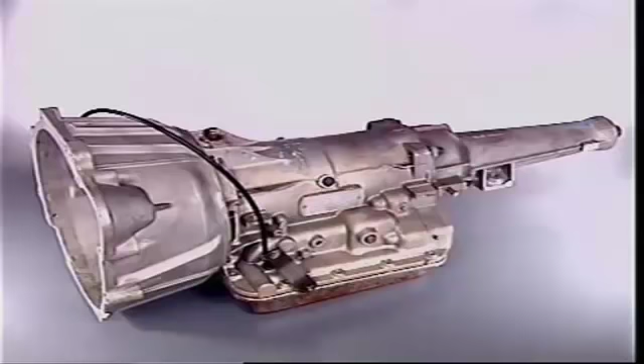A Borg-Warner 35 transmission has 3 forward gear ratios and reverse. The selector lever works in a quadrant with 6 stations: park, reverse, neutral, drive, second, first.

With D selected, the vehicle will move off in first gear, will change to second and then to third, in accordance with road speed and engine load.

Downshifts from third to second or second to first are also fully automatic, unless the driver resorts to kickdown. Kickdown changes are useful when short bursts of acceleration are required and occur at higher speeds than automatic changes. Automatic upshifts occur immediately accelerator pressure eases, following a kickdown.

Automatic gear changes may be overridden by use of the 2 and 1 selector positions. If 1 is selected from rest, first gear will be held until the selector is moved to 2, when second gear will engage. Moving to D will then give third gear, provided that road speed and throttle opening are suitable.

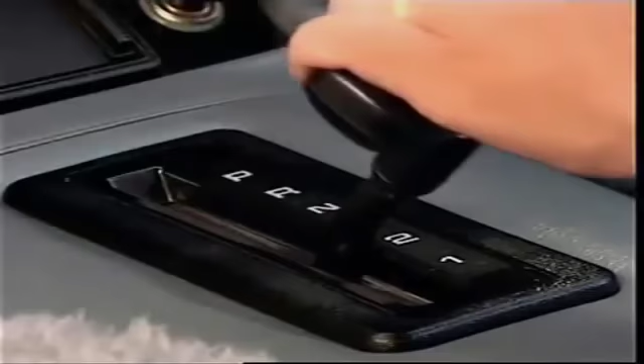Selector position 2 also permits automatic changes, but from first to second and from second to first only, depending on road speed and throttle opening. Third gear will not engage in this position.

With the vehicle cruising in third, selecting 2 will cause an immediate downshift to second. Selecting 1 in similar conditions causes an immediate downshift to second, and then, when road speed drops sufficiently, to first. Full engine braking is available in both second and first gears.

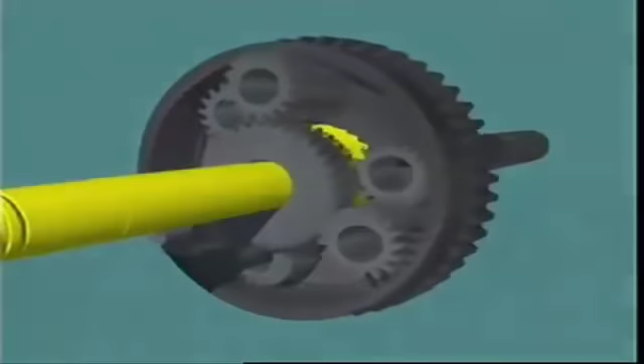The planetary gear set is a Ravigneaux type with primary and secondary sun gears, primary and secondary planet pinions, and 1 ring gear.

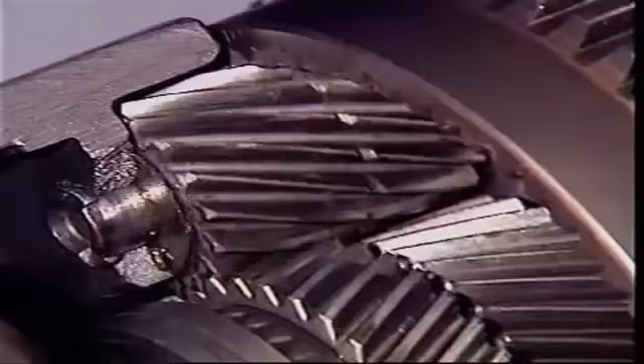The ring gear is attached to the output shaft. The planet carrier is mounted in the transmission case on a 1-way clutch. Both sets of pinions are in the planet carrier. They mesh in pairs. The longer outer secondary pinions mesh with the ring gear at their outer edge.

At their inner edge, they mesh with the secondary sun gear. The smaller primary pinions mesh with the smaller primary sun gear. The planet pinions transmit the drive from the sun gears to the ring gear.

In all forward ratios, drive is transmitted through the primary sun gear. In reverse, it is transmitted through the secondary sun gear.

Control of the planetary gear set comes from the operation of 2 multi-plate clutches, the 1-way clutch and 2 brake bands. The outer plates of the front clutch are splined to the input shaft from the converter turbine. The inner plates are splined to the primary sun gear shaft.

The inner plates of the rear clutch are splined to the front clutch drum. The outer plates connect to the secondary sun gear.

The front band wraps around the outside of the rear clutch drum. The rear band is on the outside of the planet carrier to hold the planet carrier stationary when it is applied.

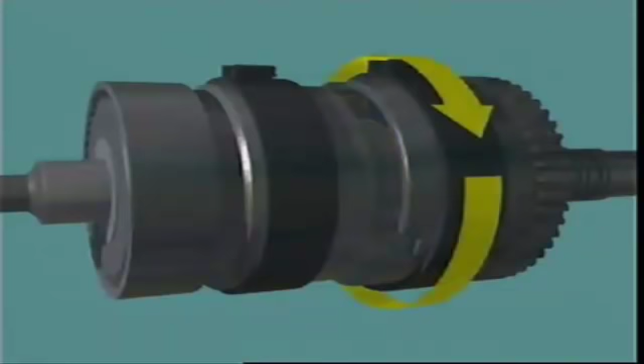When the rear band is in the release position, the 1-way clutch lets the planet carrier rotate forward, but not in a reverse direction.

These are the components and control elements engaged in each gear range: the front clutch, the rear clutch, the front band, the rear band, and the 1-way clutch.

The front clutch combines with other elements to provide the required ratios for all forward gears. When D is selected, the front clutch is engaged. The one-way clutch acts as the reaction member, holding the planet carrier stationary and stopping it rotating in the opposite direction to the input shaft.

Power flow is from the input shaft through the applied front clutch to the primary sun gear, which turns clockwise. Since the primary sun gear is meshed with the primary pinions, the pinions rotate anti-clockwise.

This turns the secondary pinions clockwise on their pins on the locked planet carrier. The secondary pinions turn the ring gear and the output shaft in a clockwise direction at a reduced ratio and with increased torque.

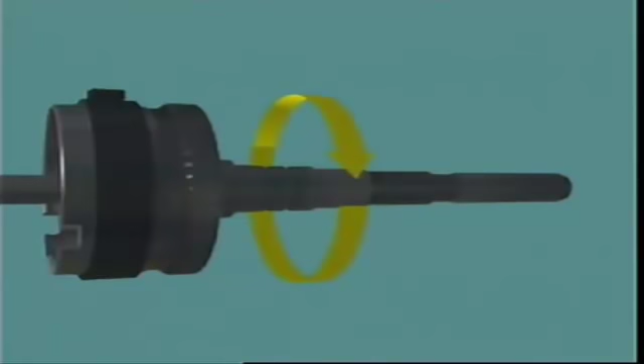The gear reduction in first gear is 2.39 to 1. The secondary sun gear rotates freely in the opposite direction to the primary sun gear.

On overrun, when torque is applied from the road wheels, the one-way clutch unlocks and allows the planet carrier to rotate. The transmission free wheels and no engine braking is provided.

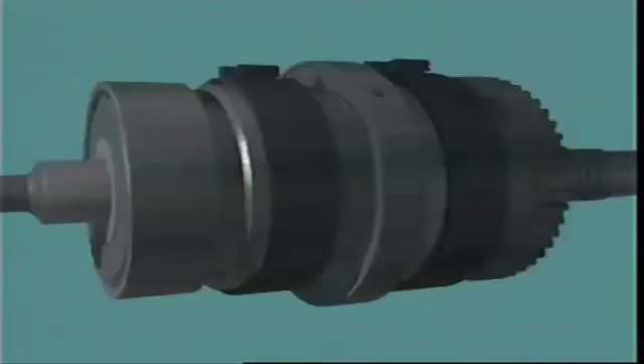In selector position D and also in position 2, the front clutch and the front band are applied to obtain second gear. When the transmission changes from first to second, the front clutch remains engaged and the front band is applied to lock the secondary sun gear to the case.

The secondary sun gear now becomes the reaction member. Power flow is from the input shaft through the applied front clutch to the primary sun gear and to the primary pinions.

The anti-clockwise rotation of the primary pinions turns the secondary pinions clockwise. Since they mesh with the secondary sun gear and the ring gear, they walk around the stationary sun gear and rotate the ring gear in a clockwise direction.

In both drive and overrun conditions, torque reaction is taken by the applied front band, which holds in either direction. The gear reduction in second gear is 1.45 to 1.

In selector position D, the front and rear clutches are applied to obtain third gear. When the transmission changes from second to third, the front clutch remains engaged. The front band is disengaged and the rear clutch is applied.

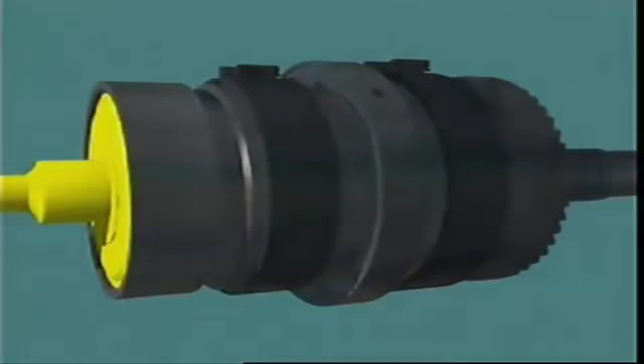Since both clutches are now applied, the input shaft is locked to the primary sun gear through the front clutch, and to the secondary sun gear through the rear clutch. With both sun gears locked together and to the input shaft, there is no relative motion between the gears. The whole gear set rotates as one unit to give a direct drive with a ratio of 1 to 1.

In selector position 1, the front clutch and the rear band are applied. Application of the rear band locks the planet carrier to the case.

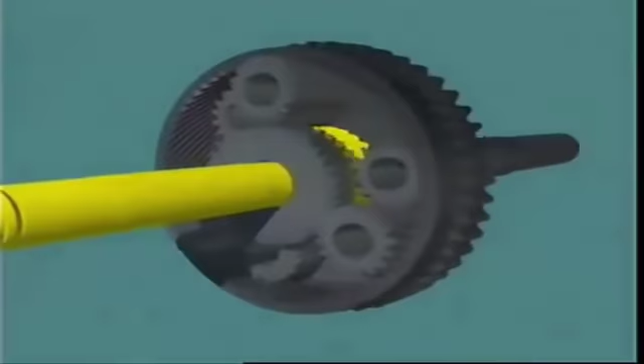Power flow through the gear set in the drive condition is the same as in selector position D, first gear. Drive is transmitted through the front clutch to the primary sun gear and through the short and long pinions to the ring gear at the ratio of 2.39 to 1.

However, on overrun, the locked planet carrier acts as a reaction member, so full engine braking is provided.

In reverse, the rear clutch and the rear band are applied. The rear clutch locks the input shaft to the secondary sun gear. The rear band locks the planet carrier to the case to provide the reaction member.

The input shaft turns the secondary sun gear clockwise. The secondary pinions turn anti-clockwise on their pins on the locked planet carrier. The ring gear and output shaft turn in the reverse direction with a ratio of 2.09 to 1. Full engine braking is provided on overrun.

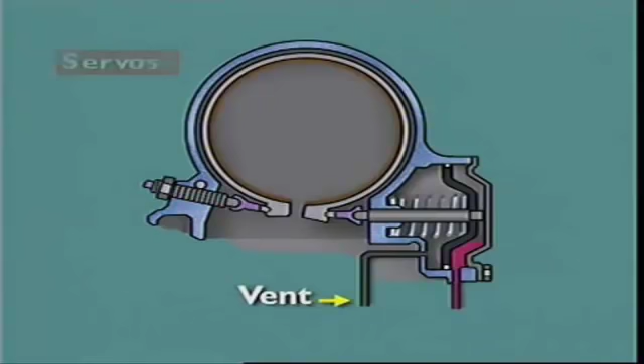Servos in automatic transmissions convert hydraulic pressure acting on a piston into a mechanical force. In this transmission, a front and a rear brake band are used. A servo is required for each.

The rear servo is a pressure apply, spring release type. Its piston has a central stem which locates in one end of the rocker arm to transfer the apply force to the band. A lever-type spiral spring returns the servo and band to the off position when the fluid is dumped. The rear band holds the planet carrier stationary when it is engaged.

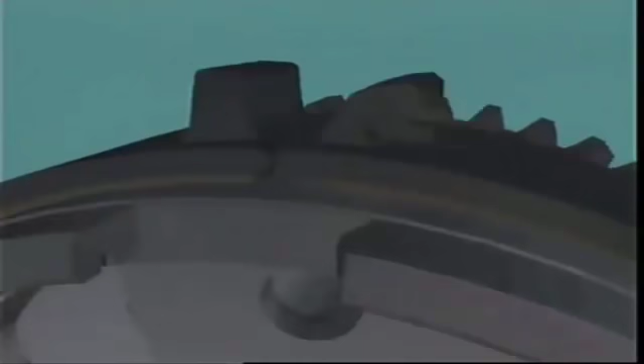It is applied in drive ranges with low ratios. The high apply force required is provided by a combination of the large diameter piston and the leverage provided by the rocker arm. Fluid at line pressure is converted to an apply force by the piston, and this acts on the longer end of the rocker arm.

The apply force is multiplied to about 5 times its value, then applied to the free end of the band.

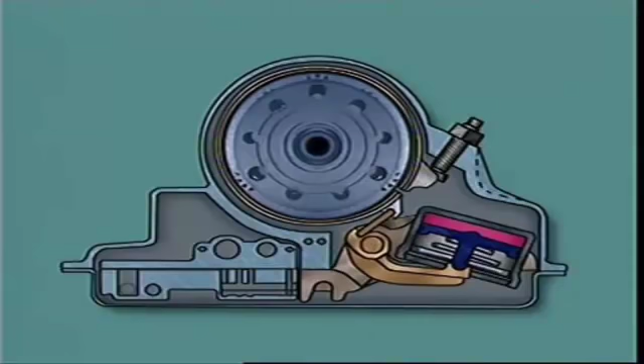The band contracts and wraps itself firmly around the planet carrier drum to lock the planet carrier to the casing. An adjusting screw threaded in the casing provides the anchorage point, so the band can be easily adjusted when necessary to compensate for wear.

The front servo is a pressure apply, pressure release type with unequal piston areas.

It is engaged with the front clutch to provide second gear and acts on a lined spring steel band to lock the secondary sun gear to the casing.

The apply force from the piston is transferred through its central stem and multiplied by the rocker arm with its leverage ratio approximately 3:1. This applies the band firmly when second gear is engaged.

The apply fluid acts on the smaller piston area surrounding the hollow portion, which accommodates the return spring.

If road speed is reduced, the 1-2 shift valve will move to the first gear position. This apply fluid will be exhausted at the 1-2 shift valve, letting the spring return the band to the off position.

If road speed increases, the transmission will eventually upshift to third gear. This requires the rear clutch to engage, together with the already engaged front clutch.

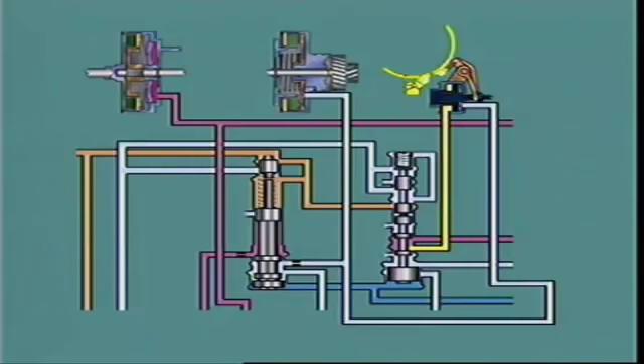The front band must be released, but the apply fluid is not exhausted to provide this change. The apply fluid is retained. Then, when the 2-3 shift valve moves to supply fluid to the rear clutch, the same fluid is supplied to the release side of the front servo.

Equal line pressures act on each side of the front servo piston, so the larger area on the release side generates greater force. This moves the piston to the released position.

If the accelerator is depressed for kickdown or road speed drops off, retaining the apply fluid can provide a snap band application to re-engage second gear.

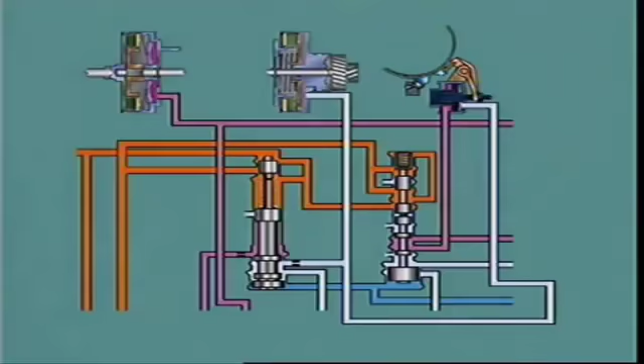Clutches in automatic transmissions control gear train members. This transmission has three clutches. A one-way or overrunning clutch is between the planet carrier and the center support. A multi-plate clutch is inside the drum attached to the input shaft, the front clutch. A multi-plate clutch is inside the drum attached to the secondary sun gear, the rear clutch.

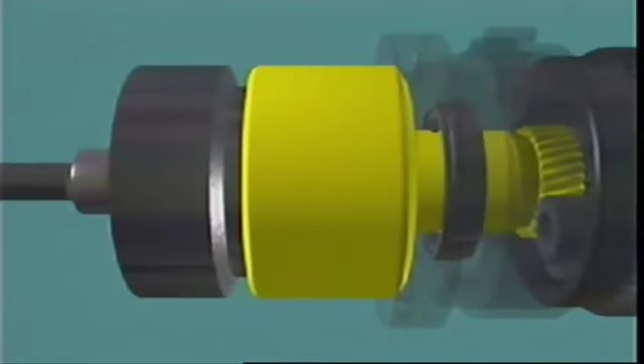The one-way clutch is a sprag type. It locks the planet carrier to the center support whenever the carrier tends to turn in the opposite direction to the transmission input shaft. The inner race of the clutch is provided by an extension on the center support. The outer race is formed in the planet carrier.

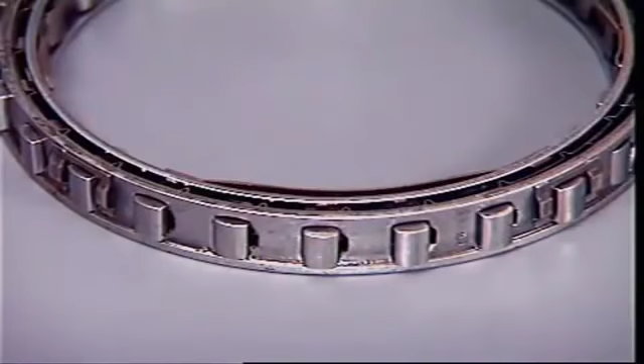The equally spaced sprags are held together by a spring-loaded cage. It maintains them in the correct position and attitude. Correct fitting is essential, otherwise the planet carrier will freewheel when it should be locked up, and no drive will be transmitted in D-range first gear.

With the sprags in place, the cage moves them so that they share the load equally when the planet carrier is locked. Turning the planet carrier in the opposite direction to the input shaft pivots the sprags towards the larger radius and wedges them between the two races.

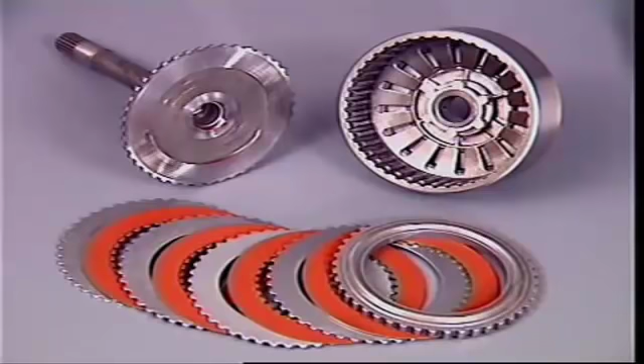The front clutch is a multiplate type, engaged in all forward ratios. The clutch operating piston moves in a short cylinder in the clutch drum. A diaphragm-type spring contacts a fulcrum ring on the piston at its inner circumference. Its outer edge rests against a step in the drum.

A pressure plate is installed first in the clutch pack, so that its fulcrum ring also contacts the diaphragm. When fluid at line pressure is admitted to the clutch cylinder, the piston apply force is multiplied by the leverage provided by the diaphragm. This exerts a greater apply force on the clutch pack than the piston alone could provide, and ensures the clutch is firmly engaged. The spring returns the piston to the off position when the fluid is dumped.

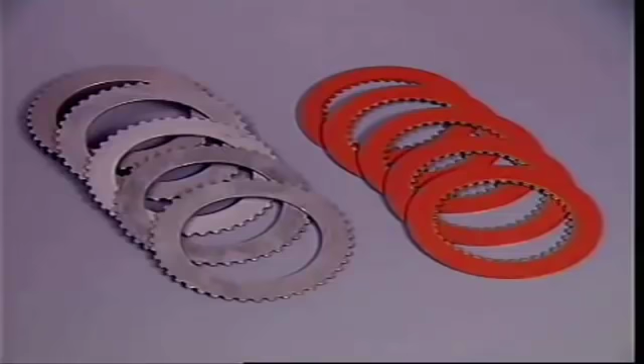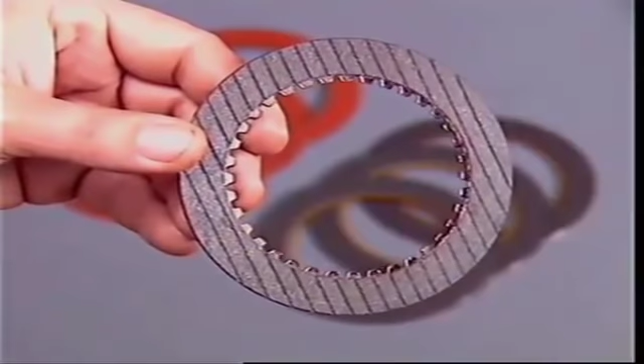Two sets of plates make up the clutch pack: the driving plates and driven plates. The outer driving plates are flat. External splines locate in mating splines in the clutch drum. The inner driven plates have friction material bonded to them. Their splines mate with splines on the outside of a central hub, which is itself splined to the primary sun gear. The friction material can be treated fiber or reinforced paper. It may have a grooved surface to assist in wiping oil from between the plates when the clutch engages.

The plates are loaded into the clutch drum against the pressure plate and are placed alternately to make up the pack. The central hub is installed to engage the inner plates and the thrust washer placed in position. The large face of the input shaft acts as the final plate in the pack. The splines at its outer edge transmit the input torque to the clutch drum and the driving plates. The input shaft is retained in the drum by a large diameter snap ring.

The number of plates installed determines the torque capacity of the clutch. Installing more plates increases torque capacity, but the clutch must always maintain its set clearance so the plates can separate from one another while in the released position. A centrifugal relief valve in the clutch piston releases fluid trapped in the cylinder when the clutch is released. This prevents partial application of the clutch due to centrifugal force acting on the fluid at high speed.

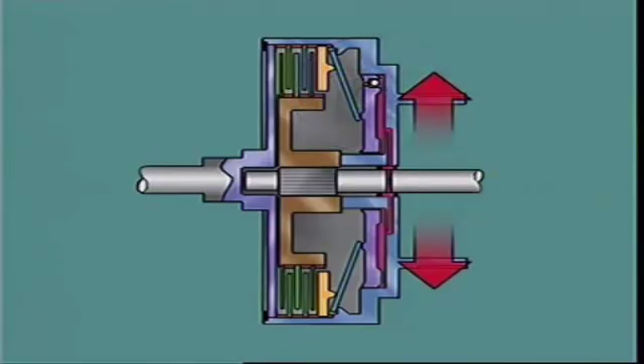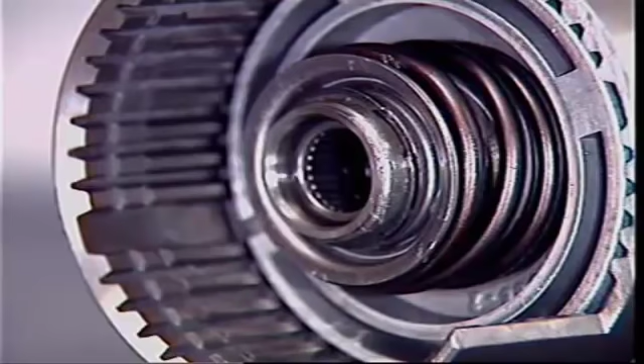The rear clutch is similar in construction to the front clutch, but with a larger diameter piston and a coil-type return spring. This spring is compressed against the face of the clutch piston when fitted. The outer plates in this clutch are the driven plates and are splined to engage with the splines in the clutch drum as before.

These plates may have a flat surface or a slightly dished or coned surface. The dished plates provide a cushioning effect, which assists with smooth engagement when the clutch is applied. The plates may be fitted as a pack, with the dishing in either direction, but all of the dishing must face the same way, or clearance may be compromised.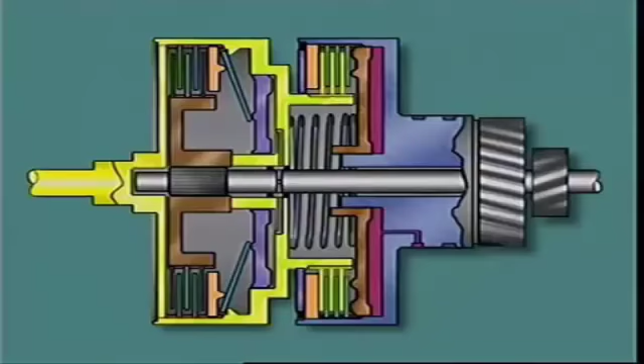The inner plates are splined to mate with splines on an extension on the front clutch drum. They transmit the drive from the input shaft to the outer plates when the clutch is engaged. The clutch plates are assembled in the pack alternately, with the steel plate placed first against the clutch piston. The pressure plate is assembled last, and the pack is retained in the drum by a snap ring.

The hydraulic system has a crescent-type gear pump, a centrifugally operated hydraulic governor, and a control valve body assembly to regulate the pressure and direct fluid to the appropriate components.

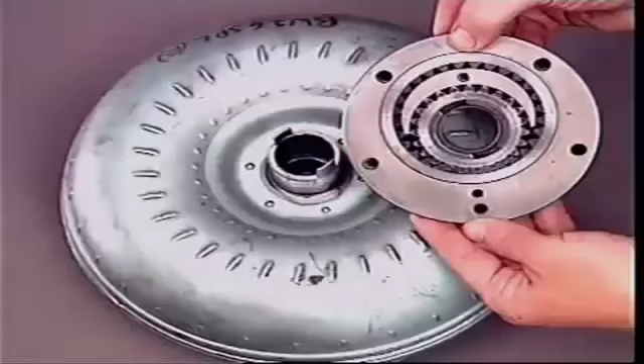The pump is driven by tangs on the converter spout and operates whenever the engine is running. It supplies all the hydraulic requirements of the transmission during operation.

The governor is driven by the transmission output shaft and provides a hydraulic pressure that varies with vehicle speed. This variable pressure is used by the valve body as one of the inputs to control upshifts and downshifts.

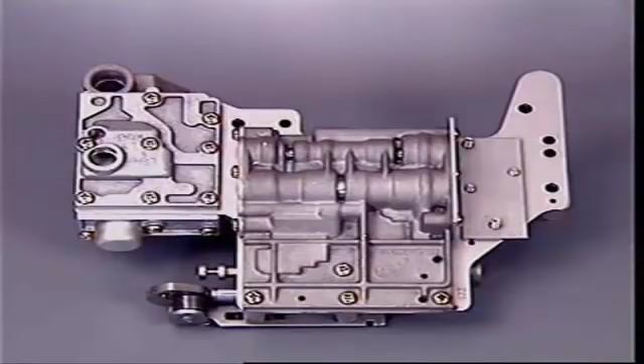The valve body has all the valves needed to control the transmission at all stages of operation. They are mostly spool-type valves, but disc and ball check valves are also used.

Cylindrical spool valves have a number of distinguishing features. The lands are the raised portions of the valve, while the reduced diameter between each pair of lands is referred to as a valley. The face of each land is square and sharp to the land diameter. Some valves have a stem or extension on one end to locate a regulating or return spring or to limit valve travel.

Sharp corners on lands keep out dirt particles and give the valve a self-cleaning action as it moves back and forth in the bore. There is only small clearance between lands and the bore for each valve, so they must be handled with care.

Spool valves can be positioned manually, or by springs, or by pressure, and in many applications have lands of different diameters. In this case, the different diameters result in a larger face area on land 1 than on land 2. This is known as a differential area.

When fluid under pressure enters port B, this differential area creates a differential force. This moves the valve to the left since the force acting on land 1 is greater than the force on land 2.

Alternatively, the valve could be moved by admitting fluid at port C. In both cases, the valve movement allows previously blocked fluid at D to flow between lands 3 and 4. It exhausts at E or passes to some other part of the system.

The valve can only be moved back to its original position by introducing spring pressure or fluid pressure on the left-hand side of land 1.

The valves can be divided into two groups: pressure regulating valves and those that direct flow and pressure, or flow control valves.

Spool-type valves are suitable for pressure regulation in automatic transmissions, as variable pressures are needed. In this regulating valve, the valve spring is compressed when pump or supply pressure is high enough. The larger land then uncovers an exhaust port to maintain a regulated output pressure.

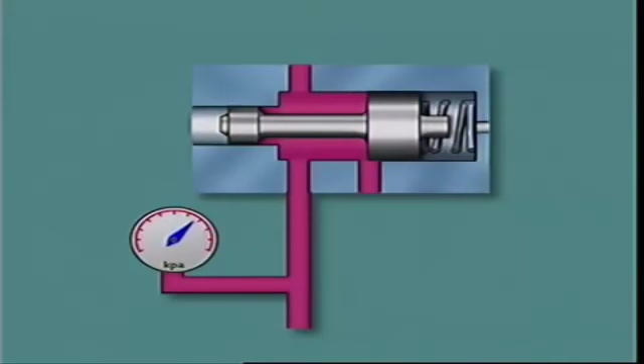Similarly, with this regulating valve in a fluid circuit, the valve is forced downwards against its spring until it uncovers a port to another part of the circuit. Since the port is not fully uncovered, flow is restricted, which causes a pressure drop across it.

Fluid pressure in this part of the circuit falls below that of the fluid being supplied. Once the port is fully uncovered, pressures on both sides of the valve become equal.

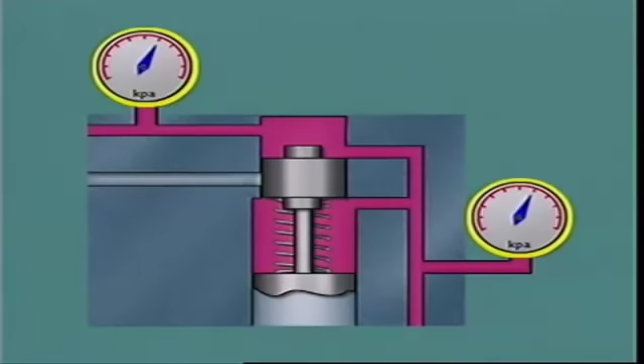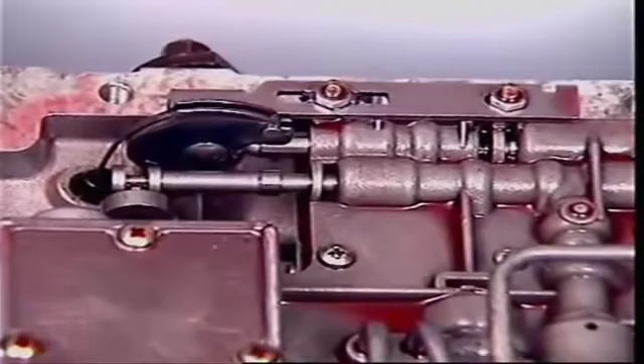Control valves are simple gate-type valves, which open or close off a circuit without altering pressure. The manual valve connected to the gear lever is a control valve, which directs fluid to components when a drive range is selected.

Control valves can also react to changes in pressure. This shift valve is held at the end of its bore by spring tension. It blocks the fluid under pressure at port A.

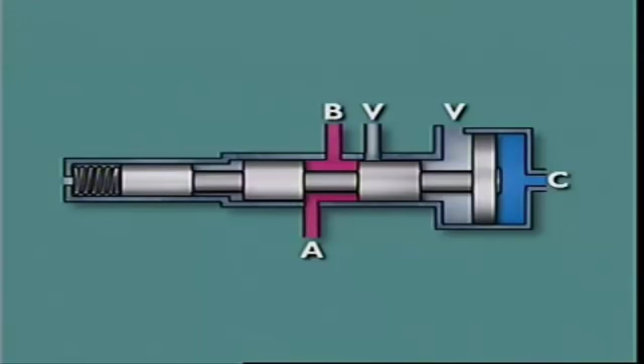The larger differential area at port C is subject to governor pressure. As road speed rises, the rising pressure forces the valve to the left, and fluid flows across from port A to port B. This can be directed to operate the next clutch or servo and change the transmission to a higher ratio. As road speed falls and governor pressure diminishes, the spring moves the valve back to cut off the fluid supply and the transmission downshifts.

Orifices are often used in conjunction with spool valves to restrict fluid flow for timing purposes or to prevent valve fluctuations. The orifice is designed to prevent sudden or undue movement of a valve.

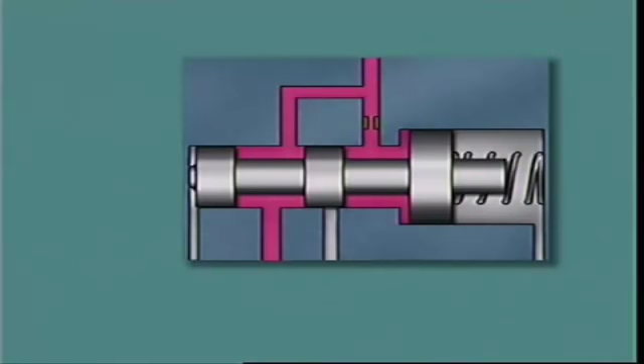In this basic primary regulator valve, the orifice is in the circuit leading to the large differential spool area. The build-up of line pressure from the pump acts via the orifice to move the valve against the spring force. This uncovers the exhaust port to release excess fluid and allows fluid at a controlled line pressure to pass to the rest of the hydraulic system.

The pressure is determined by the tension of the spring. However, pressure fluctuations are reduced because the orifice prevents the valve from reacting quickly and thus stabilizes the regulated pressure.

The hydraulic system of this transmission has a number of regulating and control valves. They can be identified in this hydraulic circuit diagram.

This valve controls fluid pump output to maintain the required line pressure in the system. Line pressure is the highest pressure in the transmission, and all other pressures are derived from it.

This valve reduces line pressure to a low value for use in the torque converter and in the cooler and lubrication circuits.

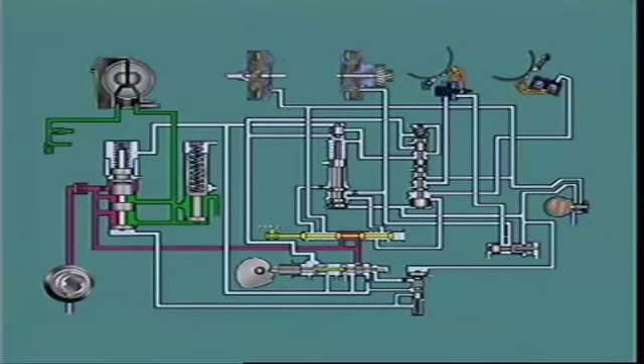This valve is positioned manually by the driver operating the selector lever. It's a control valve which directs line pressure in and out of circuits when each range is selected.

This valve shares a common bore with the downshift or kickdown valve. Both are influenced by the downshift cam, connected by a Bowden cable to the accelerator linkage.

The throttle valve re-regulates line pressure to a value which is proportional to throttle opening. The resultant throttle valve or TV pressure varies from 0 at closed throttle to line pressure at full throttle.

This pressure is supplied to the spring end of the shift valves to delay upshifts relative to throttle opening. The wider the throttle opening, the greater the TV pressure and the higher the road speed will be before an upshift will occur.

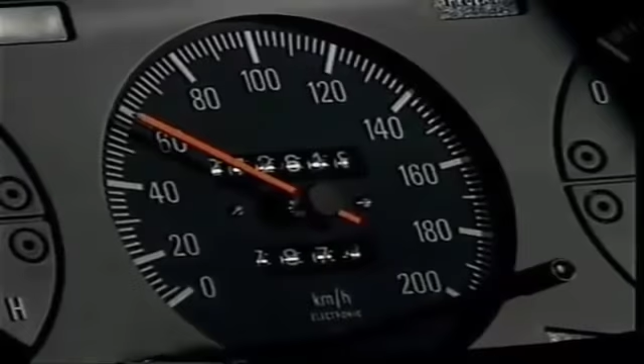TV pressure is also directed to the spring end of the primary regulating valve. As the accelerator is depressed, it progressively raises line pressure.

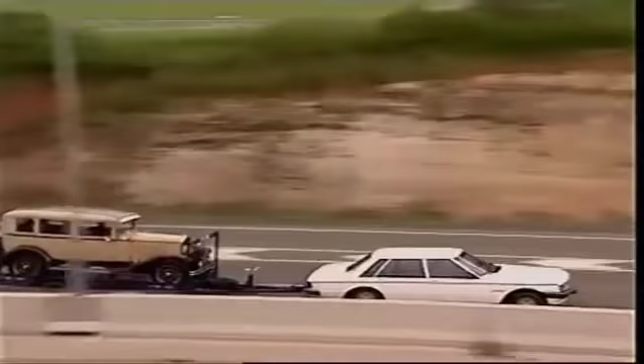This ensures the engaged servos or clutches are securely applied when high torque is being transmitted, and allows the pump to operate at lower pressures at other times. This reduces pumping losses and lowers fuel consumption.

The 1-2 and 2-3 shift valves are control valves, which are supplied with line pressure from the manual valve. They either block fluid or allow it to flow at prevailing line pressure to a clutch or band.

Their operation is determined by a spring plus TV pressure at one end. This acts in opposition to governor pressure at the other end.

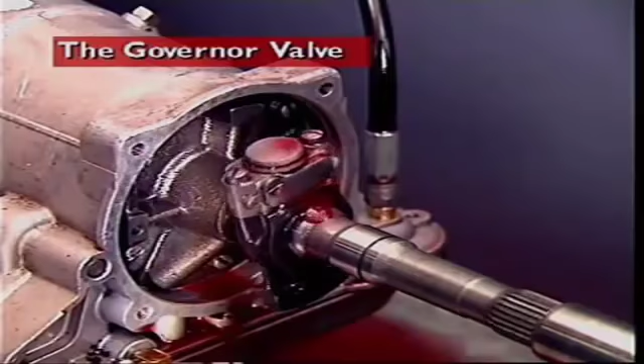This valve is mounted on the transmission output shaft and rotates with it. It re-regulates line pressure supplied from the manual valve in relation to vehicle speed.

When vehicle speed is low, governor pressure is low. When vehicle speed is high, governor pressure is high. Governor pressure is directed to the end of the shift valve to oppose TV and spring pressure. This produces upshifts relative to vehicle speed.

This valve is included in the throttle valve combination. When the accelerator is depressed fully, the downshift valve supplies line pressure onto the spring end of the shift valve.

If road speed is below a certain value, this forces the shift valve to move and initiate a downshift to a lower gear.

This valve is in the circuit to the release side of the front band servo. It is a timing device. When a 2-3 upshift is made at higher road speeds, it correlates front band release and rear clutch application.

Conversely, it correlates rear clutch release and front band reapplication when a 3-2 downshift is made under similar conditions.

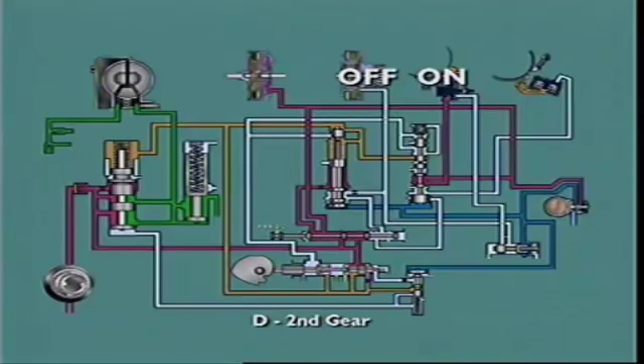This valve makes line pressure and throttle pressure sensitive to road speed. At higher speeds, it cuts back these pressures to allow smooth upshifts. It also moderates line pressure increases produced by wide throttle openings during stall or upshift conditions.

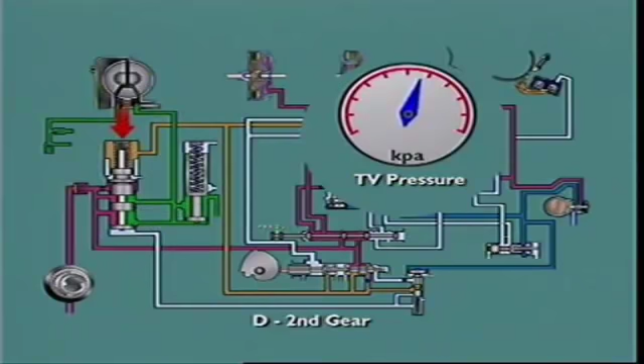High throttle pressures produced at these times raise line pressure very high. This is because the throttle pressure is applied to the spring end of the primary regulating valve. Modulator pressure is applied to the opposite end of the regulating valve to counteract this and moderate its influence.

This is a summary of the basic action of the valves in the hydraulic system. The primary regulating valve maintains line pressure in the system. Line pressure is directed to the manual valve and to the throttle valve at all times.

The secondary regulating valve determines the pressure in the converter and in the lubricating circuits. The manual valve directs line pressure to the shift valves and to the governor valve. The shift valves direct line pressure to the band and clutch servos.

Governor pressure is directed to one end of the shift valves, while throttle valve pressure is directed to the other end. Throttle pressure is also directed to the spring end of the primary regulating valve to boost line pressure as required.

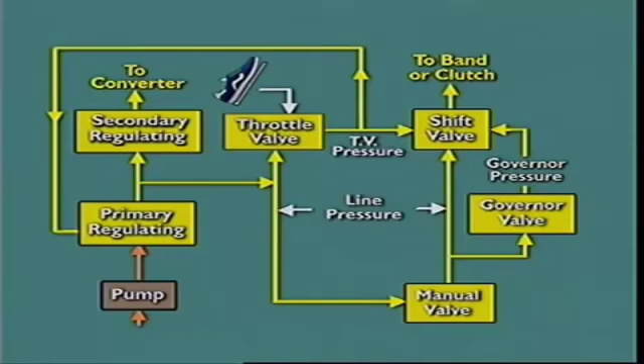The valves act together in the system, but their operation can be considered separately. The primary regulating valve has a number of lands, including one larger land which provides a differential area. A central stem locates the regulating spring.

Fluid from the pump can act on the valve through a 1 mm diameter orifice in the circuit. With the valve at rest, the two central lands block the flow of fluid across their valleys. The spring end of the valve is subject to throttle pressure through a circuit connection from the throttle valve. The lower end is subject to modulator pressure acting on the lower face of the bottom land. A vent between the two uppermost lands prevents hydraulic lockups due to fluid seeping into the valley between them.

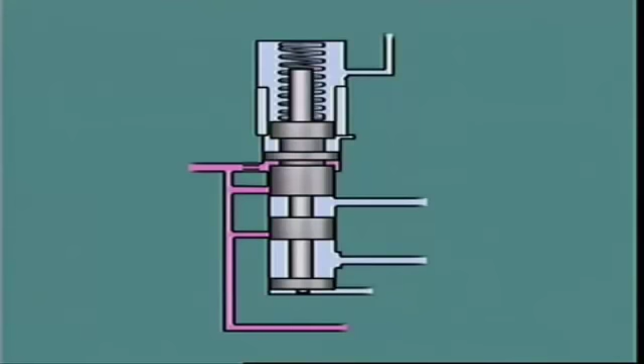In operation, fluid from the pump enters the valve through the orifice and acts against the differential area. As pressure rises, the valve moves upwards against its spring. Excess fluid can then pass across the two large valleys to the ports in line with them. The result is an initial regulation of line pressure at idling speed.

This line pressure is directed to the manual valve and the throttle valve at all times. When D is selected, line pressure is also directed to the front clutch, to the 1-2 shift valve, and to the governor. Excess fluid passing across the valleys is directed to the secondary regulating valve and the converter.

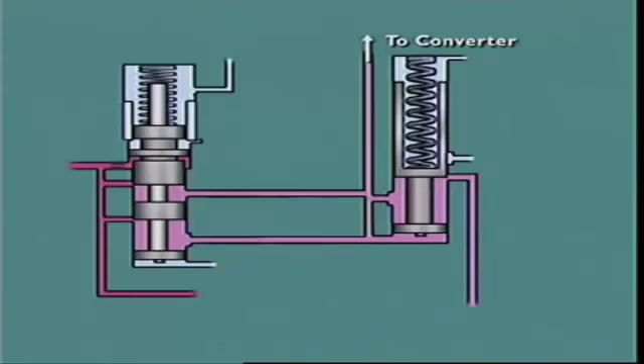Fluid from the lower port of the primary regulator valve acts on the end face of the secondary regulating valve. This raises it against its spring. Valve movement uncovers a port to the lubrication circuit for the rear end of the gear train, and then an exhaust port leading back to the pump inlet. The exhaust bleed-off stabilizes fluid pressure in the lubrication and converter circuits within acceptable limits, from 100 to 200 kilopascals.

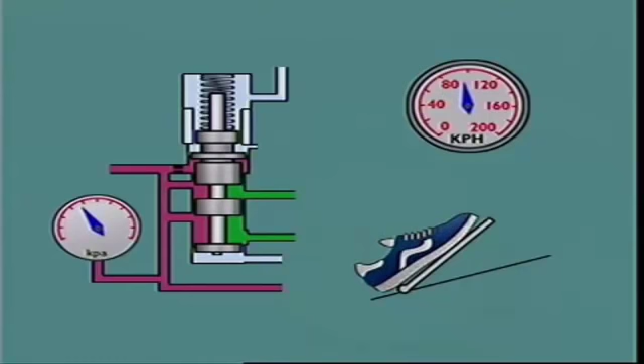Line pressure needs to vary in step with accelerator position and vehicle speed. That requires extra control over the primary regulating valve. High line pressure will hold a band or apply a clutch securely to prevent slippage when the accelerator is depressed and high torque is transmitted. Once the vehicle is moving and the transmission is upshifting, less torque is transmitted, so lower line pressure is adequate.

Applying throttle pressure to the spring end of the primary regulating valve lifts line pressure. Applying modulator pressure to the opposite end reduces it. Line pressure is supplied to the throttle valve at all times, and throttle pressure is derived from it.

At closed throttle, the throttle valve is at rest and line pressure is blocked off by a land. Throttle pressure is zero. Depressing the accelerator transfers movement through the kickdown valve and spring. This opens the throttle valve and the land uncovers the line pressure port. Fluid at line pressure is now metered into the throttle valve circuits and a TV pressure is quickly established.

It extends through the orifice to the valve reaction area. This tends to close the valve against the spring force, minimizing pressure fluctuations. A balance is established to produce a TV pressure relative to the accelerator position. TV pressure can vary from 0 to around 1200 kilopascals.

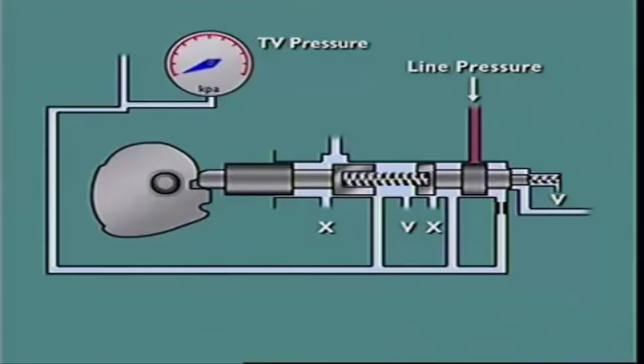TV pressure is directed back through the circuits to the spring end of the primary regulator valve. It helps the spring oppose the force of fluid acting on the valve's differential area via the orifice. TV pressure holds the primary regulator valve down to increase line pressure according to throttle opening. This ensures clutch and band apply forces are maintained in step with throttle position.

Once a vehicle is moving, the primary regulator valve needs to reduce line pressure to assist smooth gear shifting and fuel economy. Modulator valve pressure is directed to the end of the valve opposite to the regulating spring.

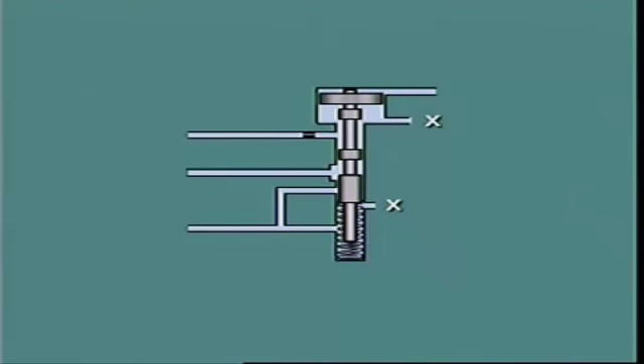The modulator valve assembly is in two sections: a modulator valve and a modulator plug and spring. The modulator valve operates by throttle pressure, but is also subject to governor pressure, so its output responds to accelerator position and vehicle speed. Throttle pressure directed to the modulator valve moves the valve up and forces the plug down against the compression of the spring. Separating the valve from the plug re-regulates the throttle pressure to modulator pressure.

It is then directed to the end of the primary regulator valve opposite the spring. If the accelerator is fully depressed, high modulator pressure forces the primary regulator valve upward to oppose throttle pressure and spring pressure. This prevents excessive line pressure under stall conditions.

Rising vehicle speed develops governor pressure, which is directed onto the large land area at the end of the modulator valve. When governor pressure overcomes throttle pressure, it forces the modulator valve down. That forces the modulator plug to bottom out. The modulator plug can then no longer reduce the incoming throttle pressure.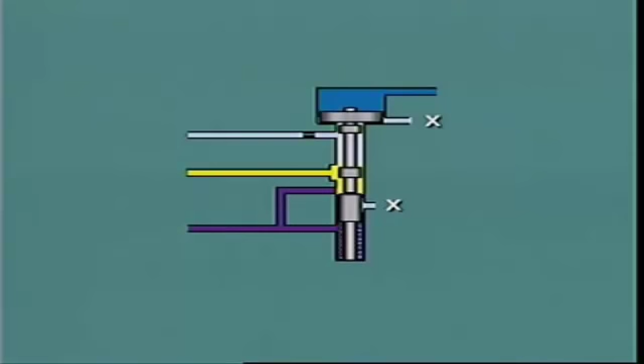Undiminished throttle pressure will now exist in the modulator circuit. The regulator valve is forced up, reducing line pressure for a smooth upshift. This reduction in line pressure is called the cutback point.

Moving the modulator valve down allows throttle pressure to pass between the modulator valve lands. This passes into a circuit, returning to the smallest reaction area at the end of the throttle valve. This pressure, acting through the orifice in the circuit, helps move the throttle valve to the left against its regulating spring. This reduces the initial throttle valve pressure established in the throttle pressure circuit, and in turn further reduces line pressure.

When D range is selected, the manual valve directs fluid at line pressure to the front clutch, which remains applied in all forward gears. Fluid is also directed to the governor and the 1-2 shift valve, where it is blocked at a differential area. A separate circuit from the manual valve directs line pressure to a differential area of the 2-3 shift valve. This is held in the downshifted, or 2, position by a combination of the differential force and the spring force.

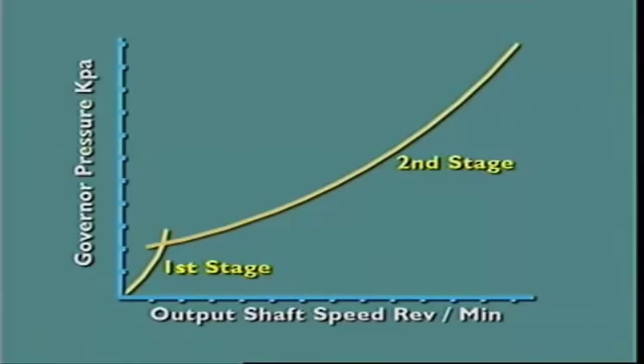The governor is in two sections: the valve and its spring, and a central stem and bob weight retained by a C-clip. It operates by centrifugal force in two stages. In the first stage, at lower road speeds, the bob weight and valve act as one unit.

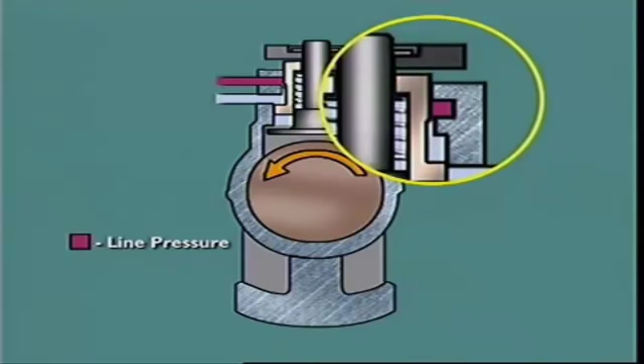Rotation of the governor throws out the bob weight, causing the valve to uncover the line pressure supply port, and fluid under pressure flows through the port to exert thrust on the face of the valve. This thrust increases until it can close the valve against the opposition of the centrifugal force. The valve action produces a pressure at the outlet proportional to the force acting on the bob weight. As speed increases, pressure needed to close the valve increases also. For any given value of line pressure, the result is a governor pressure which increases with speed.

The second stage starts when the bob weight stop contacts the body. Balance between opening and closing the valve is now achieved by the centrifugal effect on the valve and the fluid acting on its pressure face.

Governor pressure acts on the end of the 1-2 shift valve. As road speed increases, it becomes high enough to overcome the opposing spring and throttle pressure. The shift valve assembly moves upward and lets line pressure pass into the circuit to the apply side of the front band servo. The transmission is now in second gear.

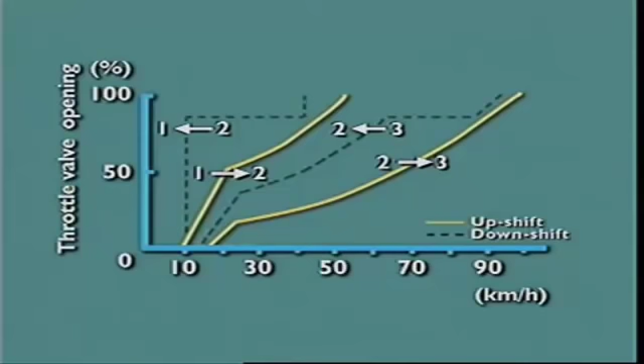Once the 1-2 upshift occurs, the differential area is no longer effective. Governor pressure must fall to a lower value to let the valve return to the first gear position, so a 2-1 downshift cannot occur at the same road speed as the upshift. Downshifts occur only at vehicle speeds below those at which upshifts occur. This shift spread prevents a transmission hunting up and down between ratios. It is called shift speed hysteresis.

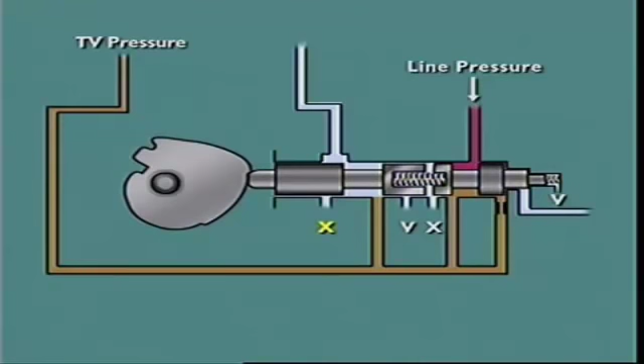Additional force can be provided to produce a 2-1 downshift under kickdown conditions. This is provided by the kickdown portion of the kickdown throttle valve combination. When the accelerator is fully depressed, the kickdown valve closes off the exhaust from the kickdown circuit and forces the throttle valve to the end of its bore. The throttle valve can then no longer regulate the incoming line pressure.

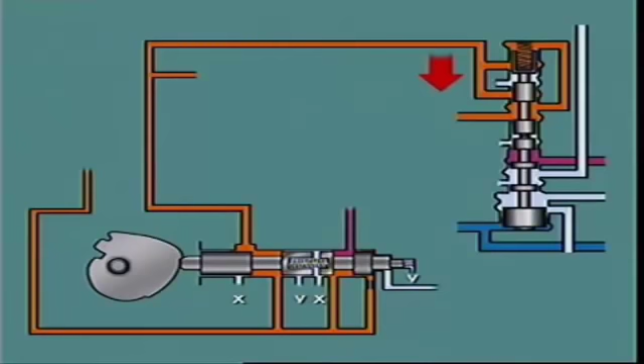Throttle pressure now becomes equal to line pressure and passes into the kickdown circuit, leading to the kickdown port at the 1-2 shift valve. Fluid passes across the valley area and onto the spring end of the plunger. The force this provides overcomes governor pressure and returns the shift valve to the first gear position. This releases the front band by opening its apply circuit and exhausting the apply fluid back to the pan.

As road speed rises, governor pressure increases. It acts on the large differential area on the bottom land, so governor pressure will become high enough to force the valve upward and overcome kickdown pressure. This keeps engine RPM within safe limits in the automatic range.

When 1 is selected, the manual valve supplies line pressure onto the differential area and through a separate circuit to apply the rear band. The application of the rear band provides engine braking on overrun. This circuit passes through the bottom valley area of the valve and acts on the large bottom land to hydraulically lock the shift valve down.

Governor pressure cannot force an upshift, so the transmission will remain in first gear until the lever is moved to 2 or to D when an upshift can occur. Once the transmission upshifts into second gear, the rear band circuit can exhaust at the shift valve. The rear band is inoperative in first gear when D is selected, as its circuit is open to exhaust at the manual valve.

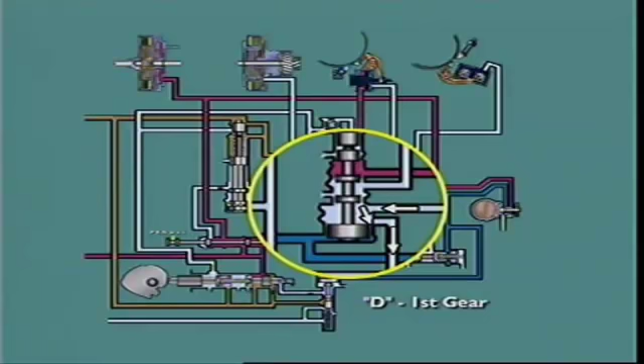Choosing position 2 directs line pressure to the front clutch, the governor and the 1-2 shift valve. The vehicle will move off in first gear and change up to second gear as soon as governor pressure is high enough to move the shift valve up and let fluid pass to the apply side of the front servo. No further upshifts can take place since no line pressure is supplied to the 2-3 shift valve. The valve moves upward under governor pressure, but it controls no fluid flow and no changes can occur.

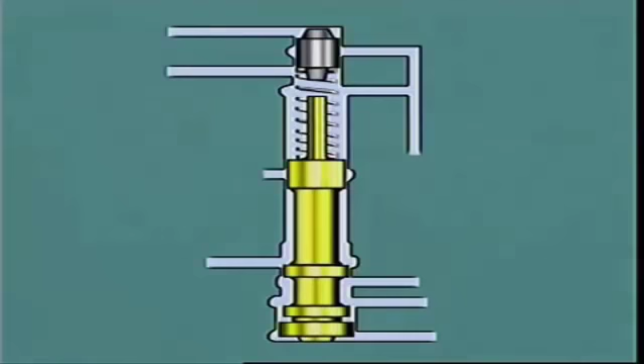The 2-3 shift valve assembly consists of the shift valve, its spring, and a throttle pressure regulating plug. In D range in second gear, line pressure from the manual valve is applied onto a differential area. This helps the spring hold the valve down against governor pressure. In this position, the rear clutch apply and front band release circuit is open to exhaust.

With the vehicle moving in second gear and a minimum throttle opening, throttle pressure applies to the top of the regulating plug. But then, throttle pressure is too low to move the regulating plug downwards. The only forces opposing governor pressure are the spring and the line pressure on the differential area land. A 2-3 upshift occurs at relatively low vehicle speed.

With the vehicle in second gear, at higher throttle openings, higher throttle pressure moves the plug down towards the shift valve. This re-regulates the throttle pressure to a lower value so that it can act on the top land of the shift valve. This helps the spring control the shift points relative to accelerator position at lower vehicle speeds.

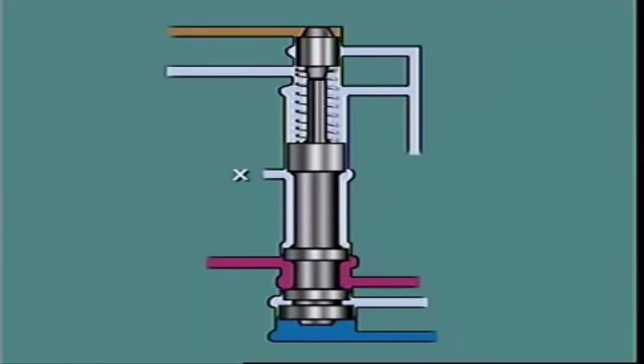As soon as governor pressure is high enough to overcome the opposing forces, the valve upshifts into top gear position. Fluid at line pressure flows across to apply the rear clutch. At the same time, fluid passes through the servo orifice control valve to the release side of the front band servo. The front and rear clutch are the only components being applied, so top gear is achieved.

The servo orifice control valve is a timing device. It prevents engine flare at wide throttle openings on a 2-3 upshift. It also stops transmission tie-up, that is, being momentarily in 2 gears during a 3-2 downshift. It's a shuttle valve, which can be held at rest by a spring to allow unrestricted fluid flow. Or it can be moved by governor pressure to insert a restricting orifice in the front band servo release circuit.

At low vehicle speeds, governor pressure is not high enough to move the valve. When the 2-3 upshift occurs, fluid flows unrestricted to the release side of the front servo. This type of shift occurs at light throttle openings, so the rapid clutch and band actuation does not cause engine flare.

At wider throttle openings, vehicle speeds are higher before an upshift occurs. So governor pressure will have built up enough to move the valve, so fluid must now pass through the orifice. This slows the release at the front band and ensures the rear clutch is fully applied and able to transmit torque as the band comes off. This prevents engine flare.

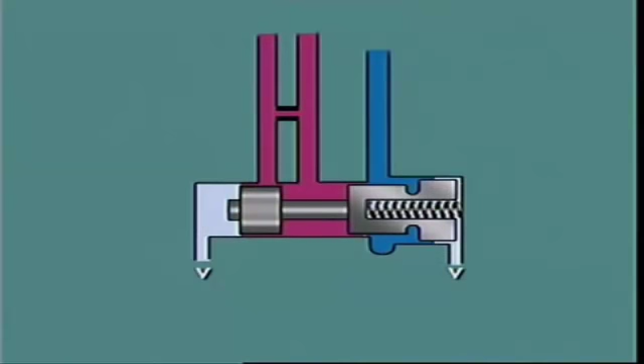On a downshift at high vehicle speeds, the orifice slows the release of fluid from the release side of the front servo and therefore the reapplication of the front band. Then the rear clutch comes off as the band is applied, preventing a lockup in the transmission.

When a 3-2 kickdown downshift is required, the fully depressed throttle stops the throttle valve regulating the incoming line pressure. Throttle pressure becomes equal to line pressure. Fluid at line pressure passes through the kickdown valve and acts on the top land of the 2-3 shift valve.

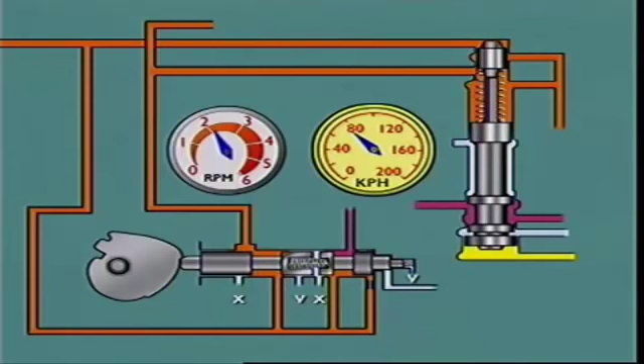If road speed and governor pressure are low enough, the force provided will move the valve down and effect a change to second gear. Then if road speed rises enough, governor pressure will overcome the opposing forces and move the shift valve upwards. If road speed is above a certain maximum, a downshift is denied, preventing over-revving.